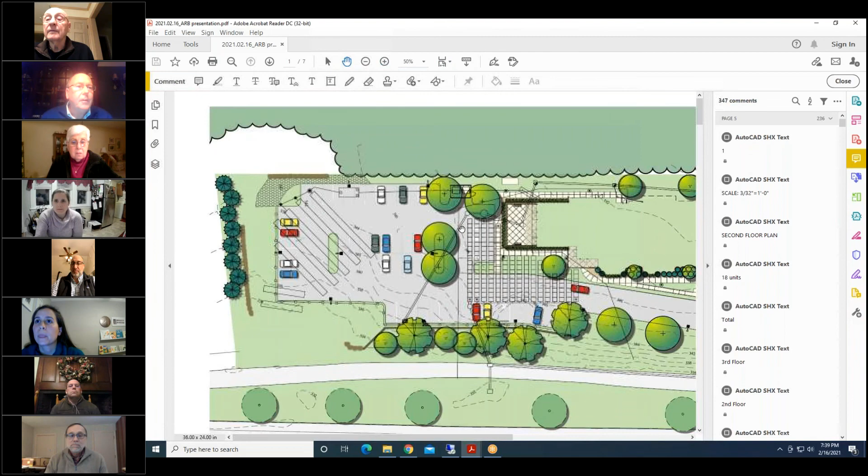Is everybody seeing the plan for Monroe Senior Center? Yes. All right, you can't see? Kathy's not seeing it, what a shame. I thought we had it. Ray's got it. Yeah, would you like me to? She's got it now. She just waved it in. She's got it now, she's all set. Okay great, thank you Kathy.

For the record, Emily Weckman with TC Design. We are back here to show you the revised plan for Monroe Senior Housing. There weren't many changes incorporated based off the town comments, but a few I would like to mention. Zooming in here on the screen, we added this walkway, which is a ramp with railings along the front walkway for town comments, to provide some pedestrian access to Route 25. Other comments were very minor, such as turning radius, some additional drainage structures, clarification on drainage report, and erosion control.

So besides that walk, there were no architectural changes to the building, no other site adjustments. And so, besides that minor change with addition of the sidewalk, there weren't any other site plan changes. So we're here to field any questions that the commission may have.

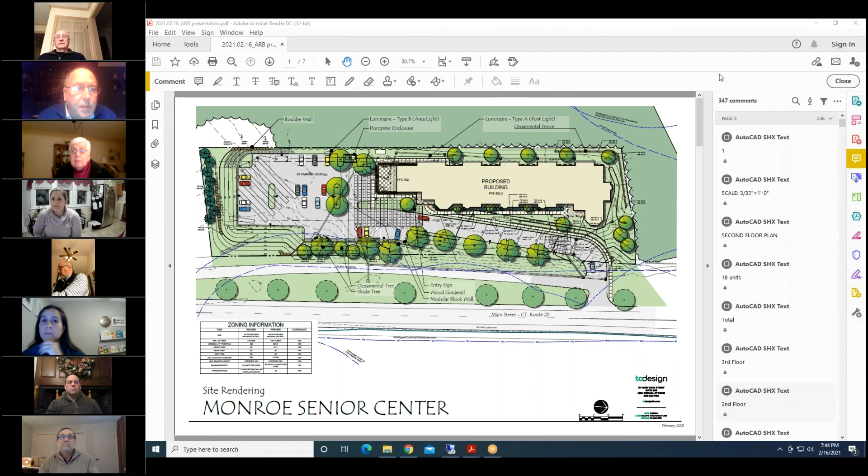I'm using my phone and I can see you all. Okay, did you hear, Emily? The only significant change was the sidewalk extended. Everything else was pretty much the same. Yes, I did see that, and I was able to enlarge my screen so I could see it.

The state wants to maintain that secondary Old State Highway section, because that was brought up at the hearing. Correct, so per DOT, they would like to keep that road as a two-way for their maintenance for snow plows. We will be working with them on the encroachment plan.

All right, to locate the... let you try. I'm close, I'm close. All right, we'll try it, we'll see how it goes. I'm sorry, I had no trouble earlier today. Now that's my voice from before, I don't know what's going on. We can hear you fine, Kathy.

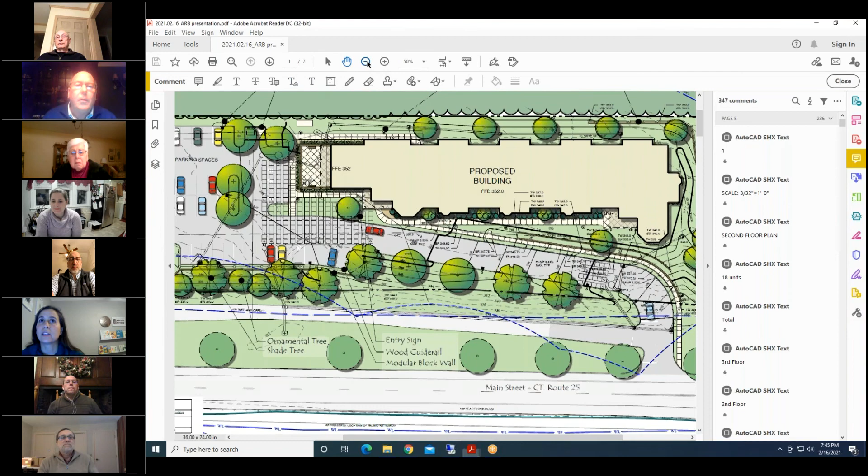The commission was very pleased with the elevations and the materials used, and the applicant was appreciative of your favorable recommendation. So the applicant's ready to move forward. The commission's going to be acting on it Thursday.

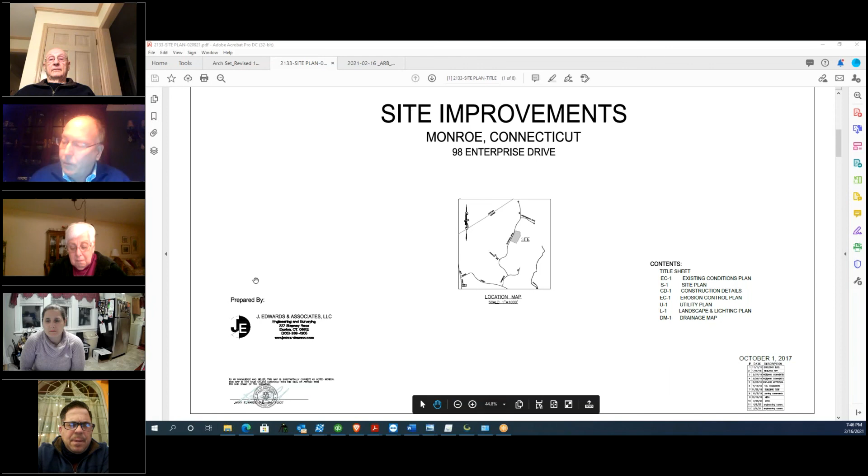Okay, we have 98 Enterprise Drive for a new 9,000 square foot industrial building. And we have tonight Jason Edwards and Daniel Bartoli. Good evening everyone, this is Jason Edwards, J. Edwards and Associates, Engineers and Surveyors, Stepney Road, Easton, Connecticut. We did the civil and site development plans for this project. So I'm going to give you just a quick rundown of the background of the project to start with.

It's a 4-acre site, currently vacant, used for material and equipment storage at this point. It's zoned Industrial 2. The original approvals were back in 2010 for 2 buildings on the property that were never constructed. That was before the current owner owned the property. Those permits, I believe, lapsed.

The current owner purchased the property in 2012, and we've been preparing different concepts of plans for the property since 2017. We received wetlands approval back in 2018 and have carried that through to basically now. We are approved through wetlands, and this is our current drawing set.

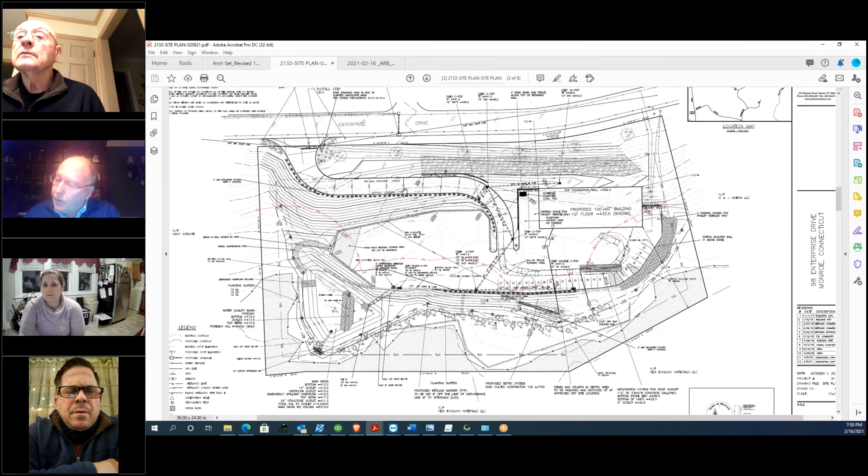We've now also proposed some plantings along the entry as well as an entry sign, designated by the owner and with some direction from town staff at the time the original layout was done. We've also shown some street trees along the top of the bank, and a few lights on the interior of the property to give adequate lighting for the building. Those would all be cutoff lights.

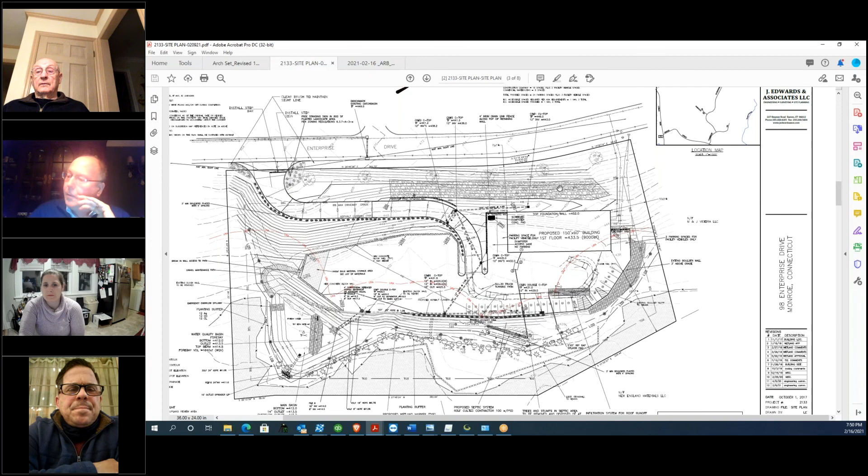From an architectural standpoint, this building sits approximately 42 feet below the road, so the floor of the building will be at 42 feet below the surface of the road above. It is essentially invisible from the road as you drive by. What you'd really see is the entry sign and the entry plantings; everything else will be below grade. That gives you a rundown of the site.

I'm going to switch over to the building plans. I think Dan Bartoli, the owner, can probably run you through what his idea is for the building.

So the building is basically just a concrete foundation and a pre-engineered steel building. It's going to be clear span with 6 doors, which will be dividable into individual bays as needed for the potential tenants.

It's typical construction, just like most of the steel buildings in that complex. We noted a green exterior and a tan roof to try to get it to blend with the environment a little bit, so it doesn't stand out. But you're not going to see much of it except possibly the roof a little bit from the road.

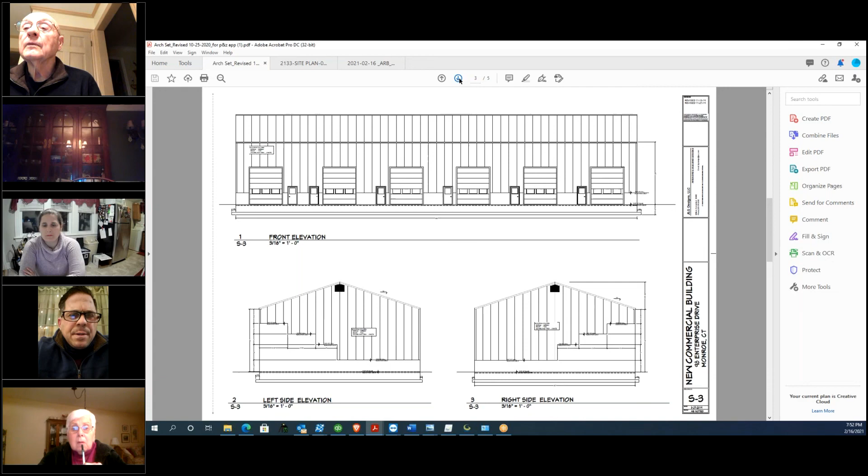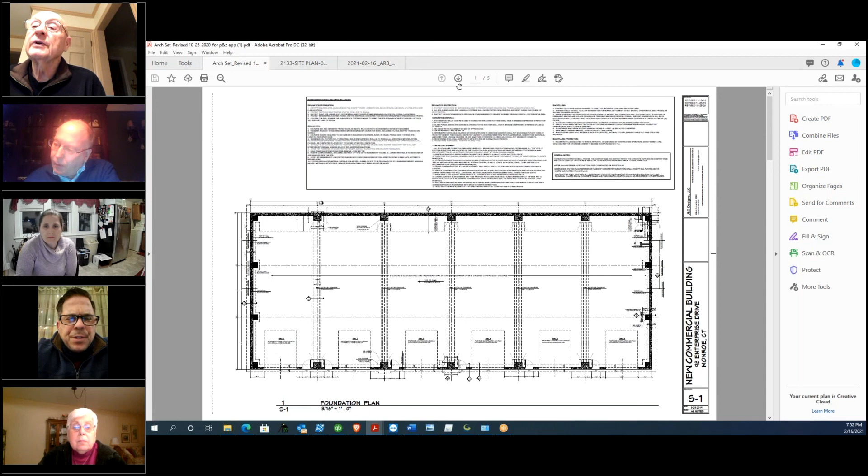I think at this point we'll take any questions that the commission has on the building. Is there anything mechanical going to be on the roof? No. Okay, so the roof's going to be nice and clean. So when we look down from the road, we're just going to see a nice, clean, beautiful roof. You're going to see a tan roof, seamed metal roof. There is a mechanical plan in the drawings that shows everything down inside the building.

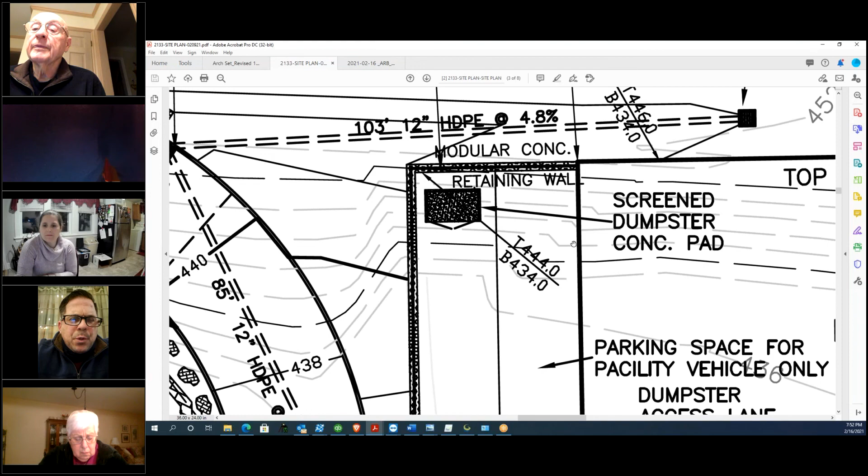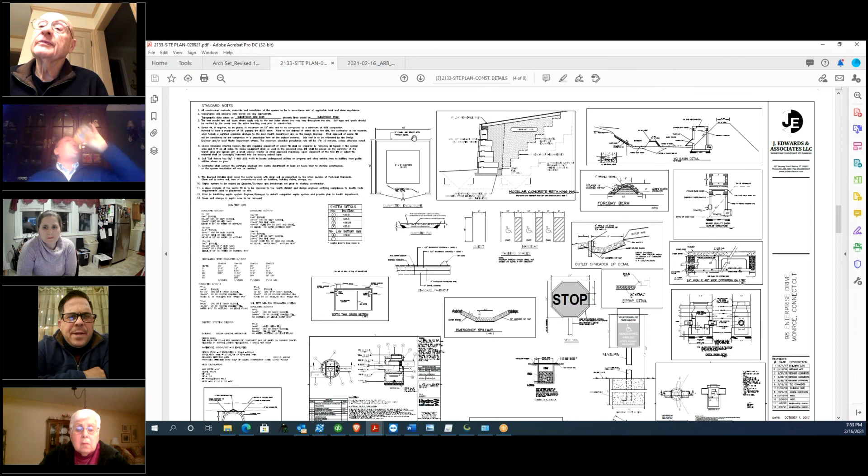Okay, good. Next thing, where is the dumpster and dumpster enclosure located? To the left side of the building, on the site plan, well below the road, tucked in along a retaining wall. And how is it enclosed? Chain link fence with slats. We don't like that, we want a nice enclosure. Slats, and we've ruled that out many years ago. Can you come up with something different, please? Yeah, we could accommodate that. Thank you, that's all I have.

Anybody else? What was the siding color? Is that staying? It's green. I had a color chart on the CD version of the package, I don't know if you have that. So it's like a forest green. So the forest green is going to be the siding.

What's the roof? It's tan. And are they doing the tan stucco foundation? Foundation is mostly backfilled because of the lay of the land there. We have one side of the building, the north side in the plan, that will be a concrete foundation while that gets backfilled. You're not going to see much steel building on that side. The wall is less than 5 feet in steel on the road side.

I'm able to see this now. Do you have any elevations that we could see, color elevations? Yeah, they're up now. Okay, that's the back side, away from the road with all the garage doors.

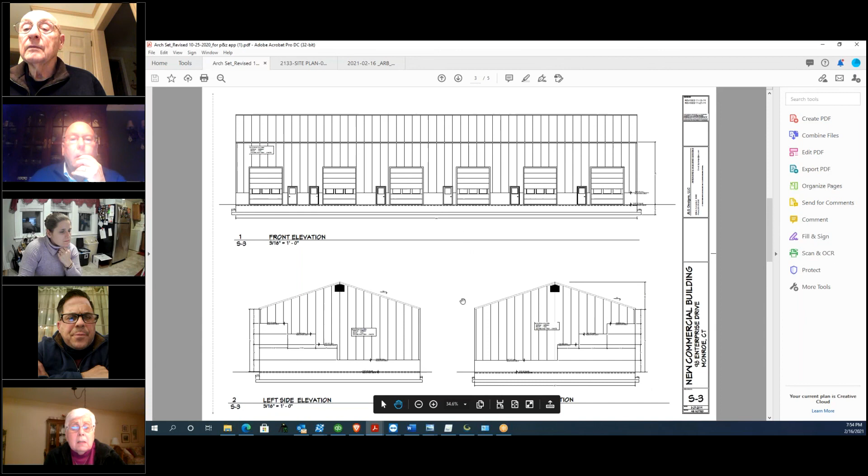And what color is that? Green, dark green. Forest green, okay. So all of the vertical siding is dark green? Correct. Okay.

And is there a picture of the front of the building? Yeah, it's on the next page, see that? Do you have any elevations that we could see? Elevation? I didn't hear the question.

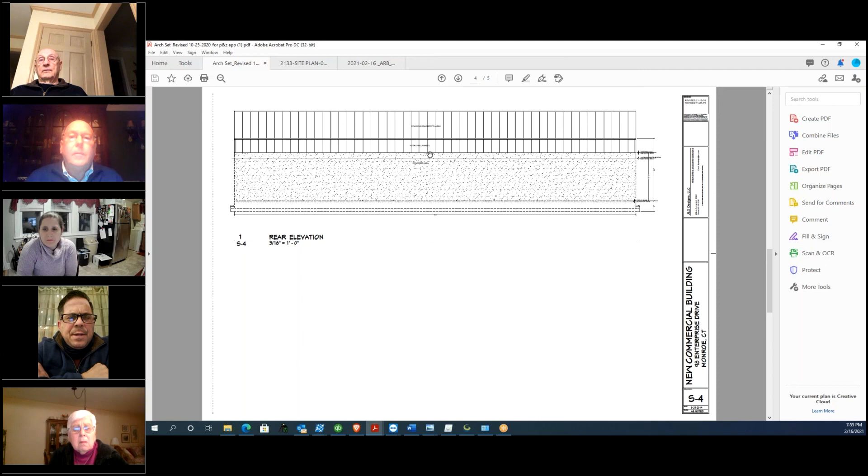So all of the vertical siding is dark green? Correct. Okay.

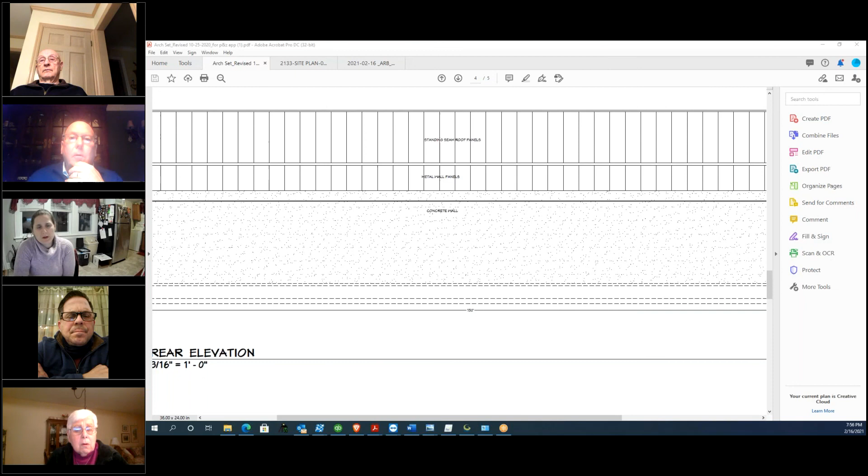I have a question. What color are the garage doors and the entry doors going to be? Garage doors will be white, and the entry doors will be gray, steel doors. Can we get that to be a little bit more consistent? Either pick one or the other. We could do all the doors white.

It's the back of the building, nobody's gonna see it, Deandra. Yeah, we just figured it'd be nice to have one or the other. We want to make sure that it's all white, you know, so they don't bump into it. Yeah, you're only gonna see that. The only ones that'll see that are the squirrels.

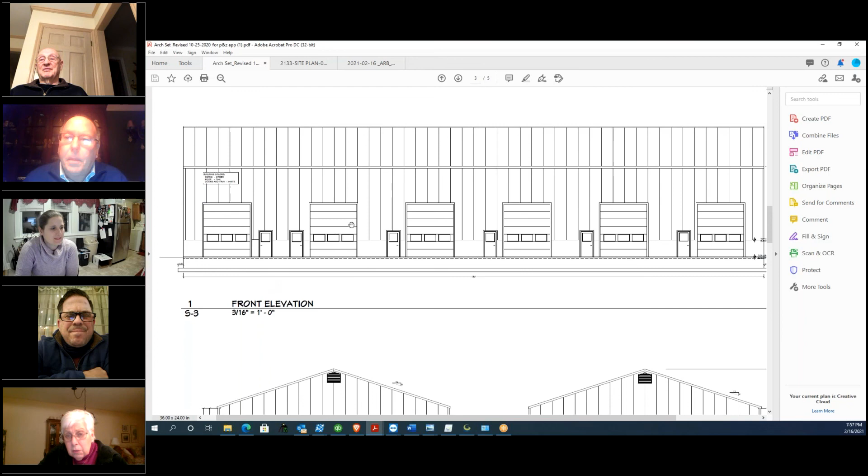Will this all proposed be for one business or are there going to be several businesses? There potentially could be several businesses in there. Could be several, okay.

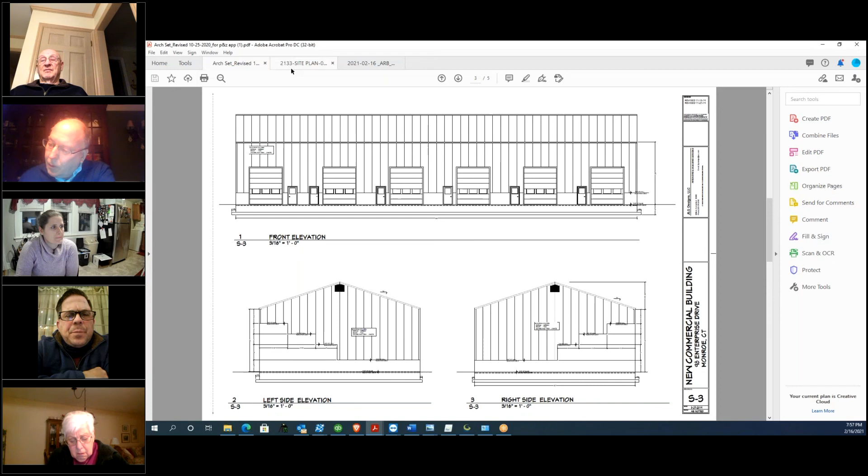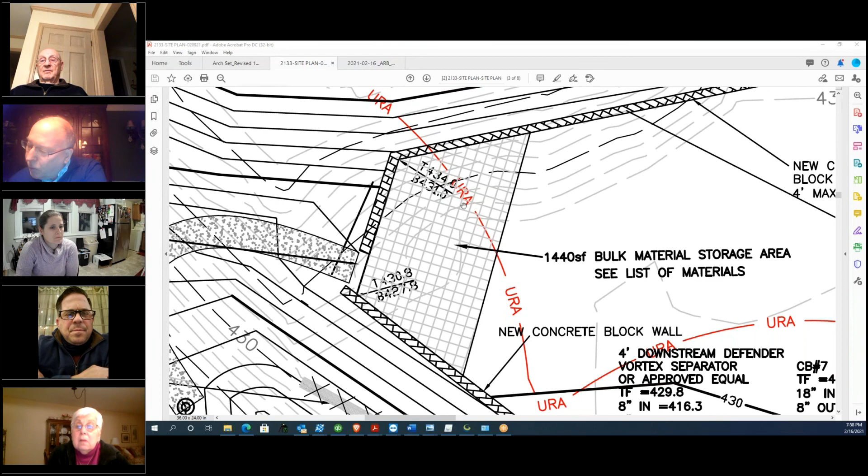And I have a question about the outside storage. Will that be screened? Yes, there's a minimal amount of outside storage, about 1,440 square feet. Can you show me on the map where that will be? Yeah, that area in the corner. And we will screen that.

Okay, will that be visible from the road or no? No, it's going to be well below the grade of the road. The road is at elevation 468, and that material storage is going to be around 428. So you're 40 feet below the road.

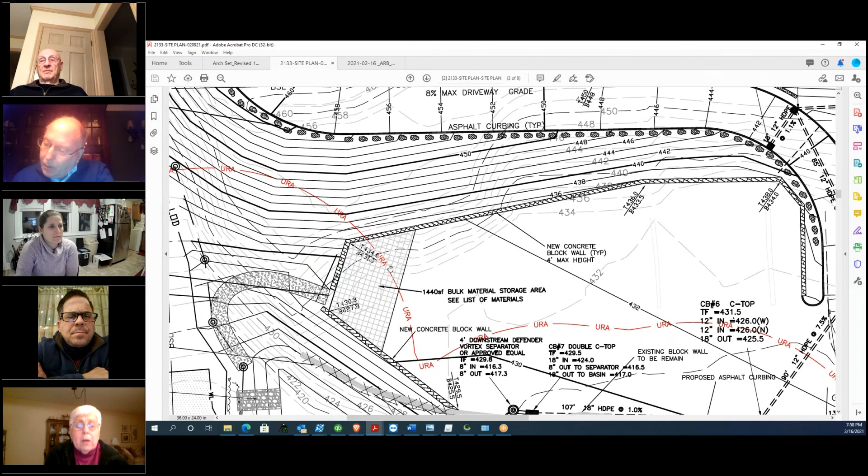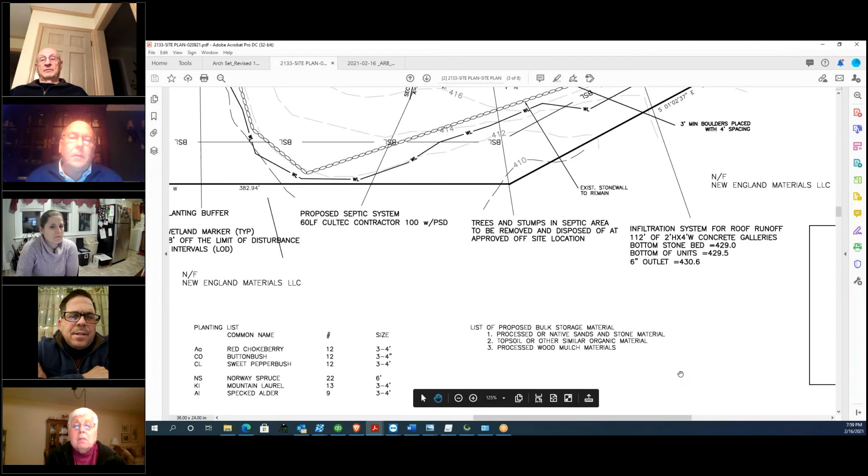And will that be organic material? What kind of materials will that be? There's a list here. It may be something like blocks, there's no really specific material. We're not going to store soils in there, but it could be building materials, excess pipe, and that type of material. Nothing that's going to degrade? No.

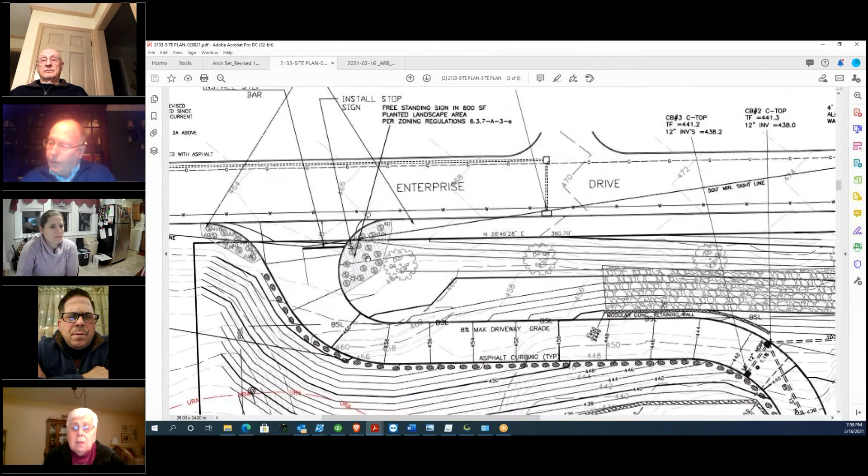And there will be landscaping along the road? Yeah, well there's some thick kind of growth up there that some of it'll stay. We have proposed a couple of oak trees to line the edge and give it a little bit more definition there. We're not going to clear cut the little stretch of forest that's there.

And Dan, can you give the board your anticipated start time? We're ready to go. We're waiting to get through this portion of the review and then right on to P&Z. Yeah, P&Z meeting is this Thursday.

So staff is pretty excited about getting this piece of property developed. So are we, and put on the grand list. We have the building design and the order in place. We haven't released it yet until we get through to P&Z, but it's a 4-month lead time on the building delivery, and we will order it before the end of the month because there's a price increase coming if we don't.

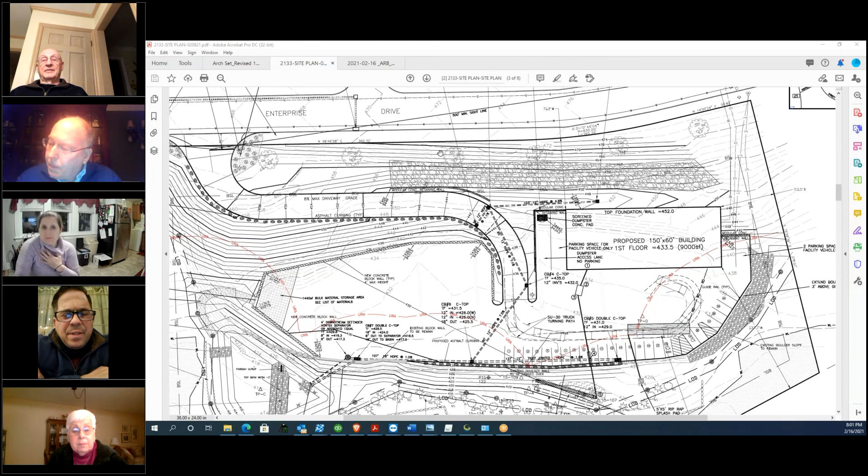Before you move on, I realize we had some real issues with sound tonight. I hear an echo every time I say something. I don't know if you hear that. We do, I'm on the phone right now. We didn't have trouble, you hear the echo? I can't imagine what's going on. That's my phone. Unless your audio on your computer's on. No, it's off. Okay, so I don't know what's going on.

Anyway, staff is very excited about this parcel being developed. This is Enterprise Drive, which is next to the illegal quarry, and a lot of sites up there have been used incorrectly. It's good to get a principal building on the site and used correctly and on the grand list. So slowly the industrial park is getting developed the way it was intended for.

So we're pretty excited. How many square feet did they say it was? This is 9,000 square feet, single story. And I'm assuming limited office space. Yes.